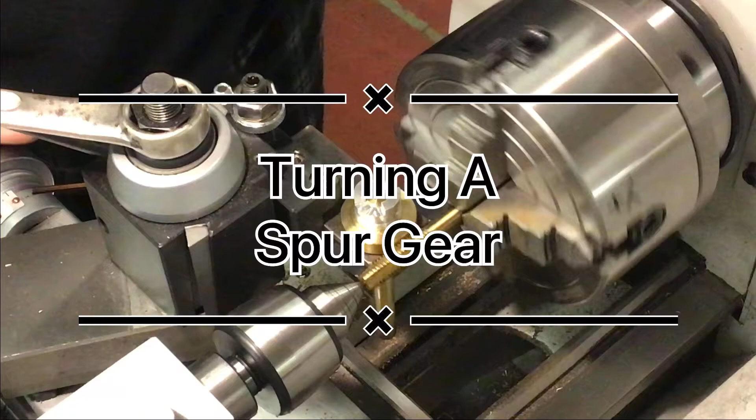Here we'll turn the spur gear of a worm gear set for the miniature winch. We'll start by advancing the cross slide in for about 10 thou cut. We'll turn slow to start with. We'll let it come one complete revolution of the spur gear, and we'll add 10 thou depth of cut for each revolution. We're using a normal screw cutting thread tap, 3/8 inch by 16 threads per inch, unified coarse. Okay, we'll speed it up a little bit as we've completed our first turn.

Start adding some lubrication and sweeping away the chips as we go. Seems to have matched up for teeth pretty good. I'll put a dot on there so we can see each revolution. Add another 10 thou cut. We've got the dog sitting on top there, just freewheeling, so I can add a little pressure to steady it a bit more. There's another revolution. Add another 10 thou depth of cut. Continue adding lubrication and sweeping away the chips.

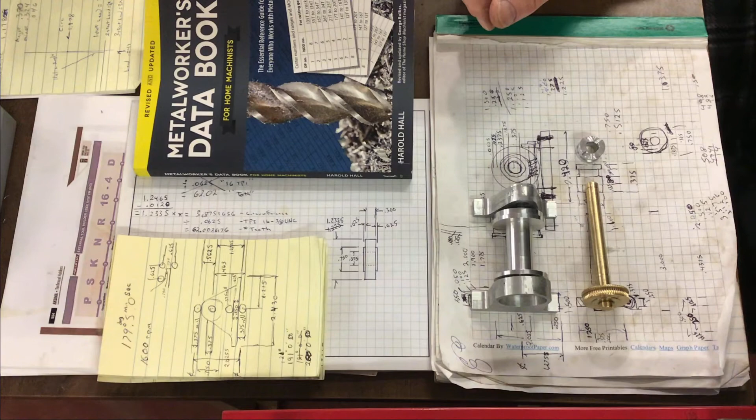Yeah, I'm pretty happy with that. Yeah, this is what it's all for - the miniature winch. Here's the pedestal side, and some of the calculations I had for milling it out.

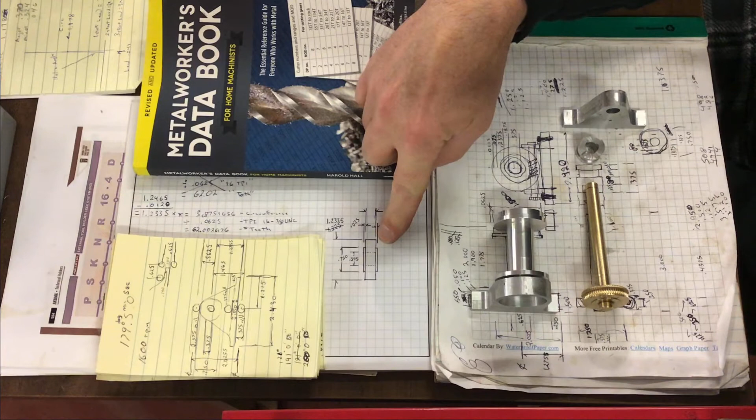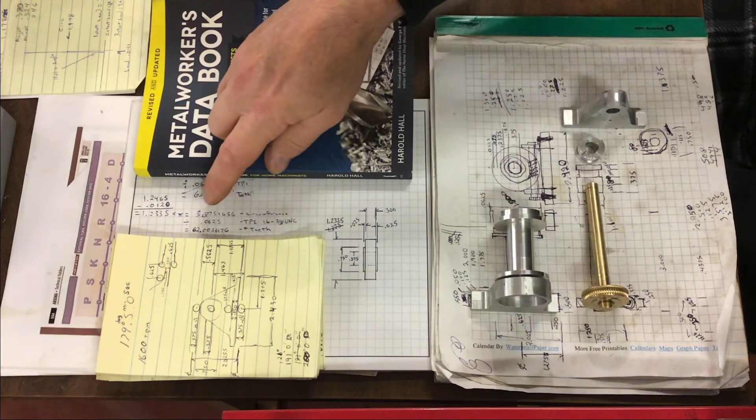Here's the calculations for the spur gear. We arrived at 1.2335 diameter times pi, which gives us 3.8751436 circumference. Divide that by 0.0625, which is the thread pitch of the 3/8 by 16 unified coarse, and that gives us 62.0022 teeth - as close as I could get to zero. So hopefully that lined up pretty well, and it appears to have done pretty good.

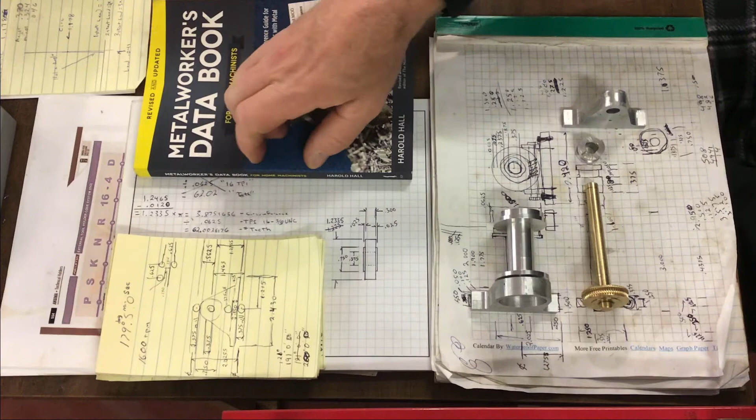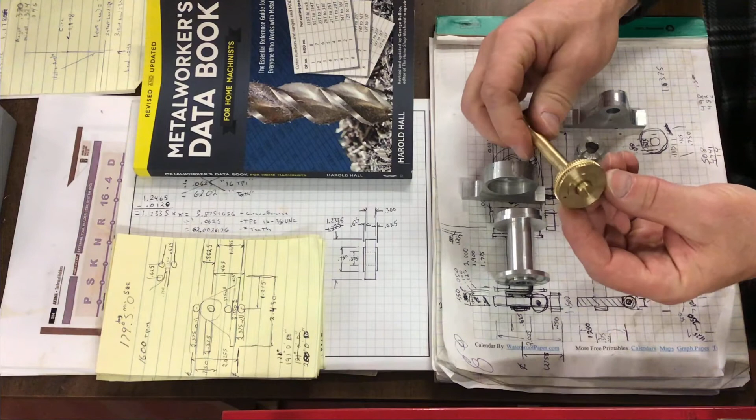So now we'll take this - the gearbox end, also cut out of the same aluminum cast as the pedestal side. We'll take our spur gear and shaft, which I will put a keyway in between the gear and the shaft. That goes into the gearbox.

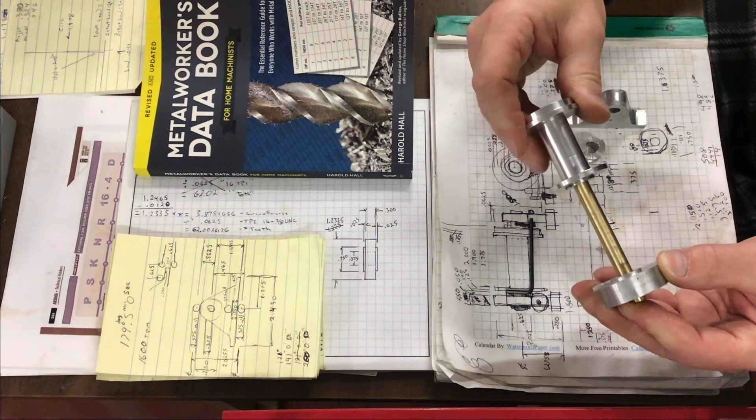And then the drum, which has the dog features as well as the band brake feature, slides over the shaft and actually freewheels on the shaft. It's the dog that does the driving when engaged. Engaged, disengaged.

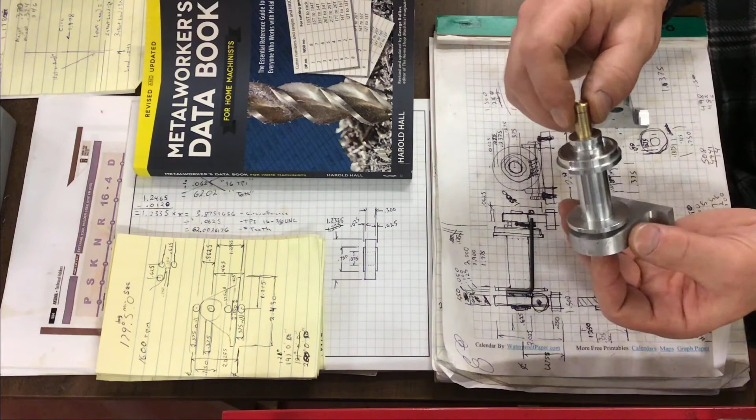Alright, and then the pedestal goes over the shaft at the end here. We'll give it enough room there for the dog to disengage and engage. Yeah, nice, enough room there.

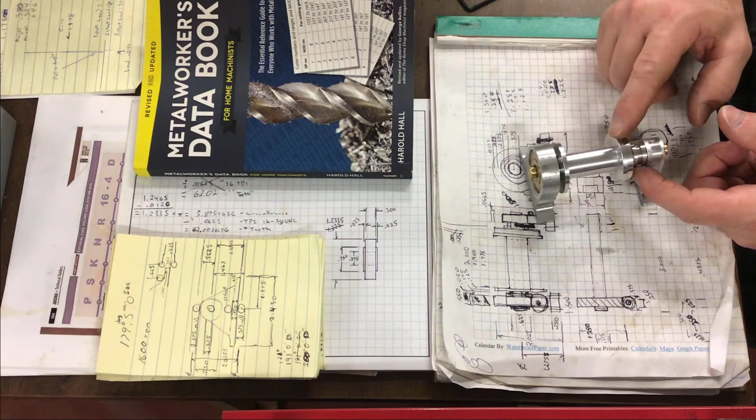We'll put a keyway between the dog and the shaft at this end, as when the shaft is driving, the dog is engaged and drives the drum. When the dog is disengaged, the drum freewheels.

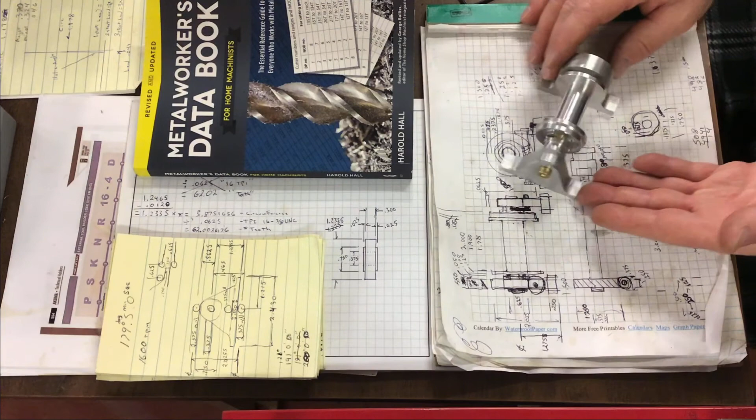Now we just need to cut the pinion for the bottom. It goes through - we'll drill it through and run it in the bottom of the gearbox. Our pinion will come through the bottom, and we'll have the drive on the back side. And that about does it.